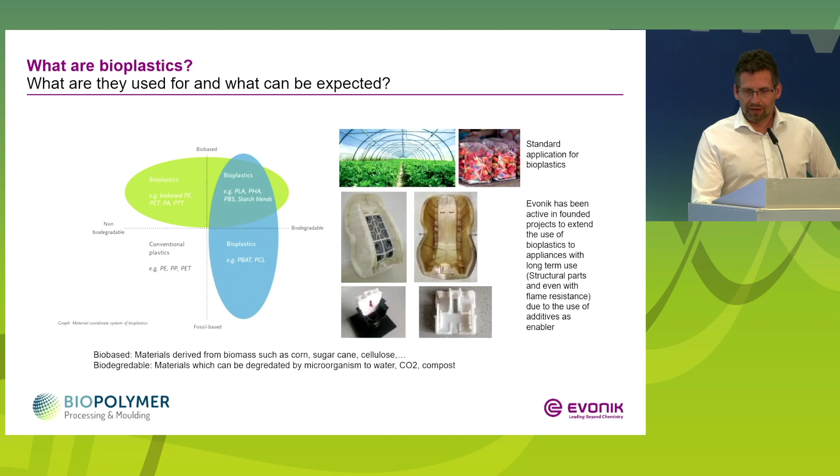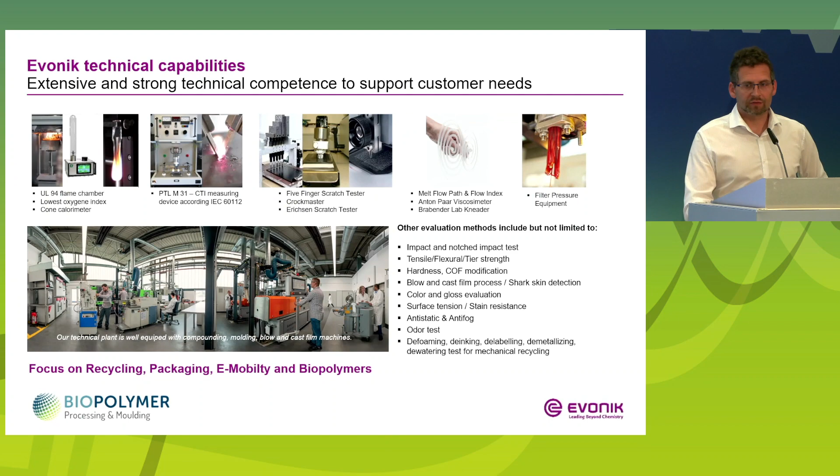The department I'm working for at Evonik is the application technology department. In my department we have a pilot plant with most of the plastics processing possibilities our customers are using. Our idea is to support our customers as well as possible, and therefore we build up know-how in a lot of different applications, especially flame retardant polymers, scratch resistant polymers, and dispersing of fillers, flame retardants and pigments. To evaluate the properties of the plastics, we have a variety of equipment in our lab. As already said in the introduction, we are now focusing on recycling, packaging, e-mobility, and biopolymer topics.

Therefore I will come to my agenda after this short introduction. First I will introduce our additive technologies, then in the main part of the presentation I will show you results from the research projects, the TechPLAstic and the RegScha project. At the end of my presentation, I will say a few words about our activities regarding plastics recycling, and finally a sustainable approach of a PPA for filmmaking.

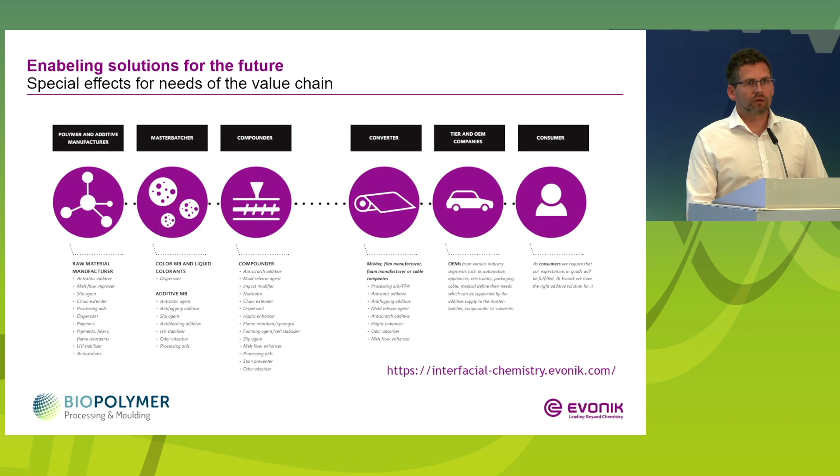Starting with a view of our activities, we try to approach the whole process chain, starting with the raw material manufacturers, which could be the polymer manufacturers but also the filler manufacturers. Here we offer solutions, for example a surface treatment for a pigment to make it more compatible with the polymer. The main customers are master batchers and compounders, where we have a wide portfolio of processing and performance additives. Since a few years, we enhanced our portfolio with our Accurel portfolio for the converters, where we approach molders and especially filmmakers so they can add a certain value to their product, like an anti-fogging aid. What is most important for us is that we are in intensive exchange with our customers, to get a deep knowledge of the market needs.

Regarding the additive technologies, we divided them today into 4 groups. The first group is the so-called organic modified siloxanes.

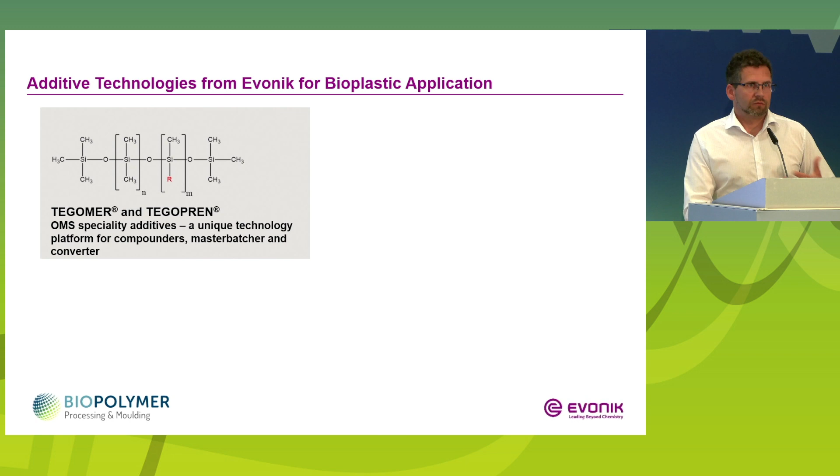So this is the specialty for our site in Essen, that we produce siloxane materials, and the specialty is the organic modification, which can be adjusted in a wide range, and we can offer different effects with this product group.

The second big product portfolio group are the organic-based dispersing aids. Here we have no siloxane backbone, but a polymeric backbone, where we add hydrophilic and organophilic groups to have a compatibilizing effect. This is the second group.

The third group of additive technology we offer is a so-called odor absorber technology, which is mainly used for recycled polymers. The fourth group is the so-called Accurel technology, which is a sponge-like porous polymer, and this is not one polymer - we have a portfolio of a wide range of polymers. The specialty is that we can produce, based on these different polymers, master batches out of liquid additives to turn them into solid ones.

And this is the first overlap with the bio-based or bioplastics topics. Here we offer two grades, based on the one hand on PLA and on a biopolyester. For you as a processor of biopolymer materials, if you want to add an additive and it's liquid and you want to turn it into a solid one, because a solid one is more easy to feed, we can offer to turn this special liquid additive into a solid one based on these materials.

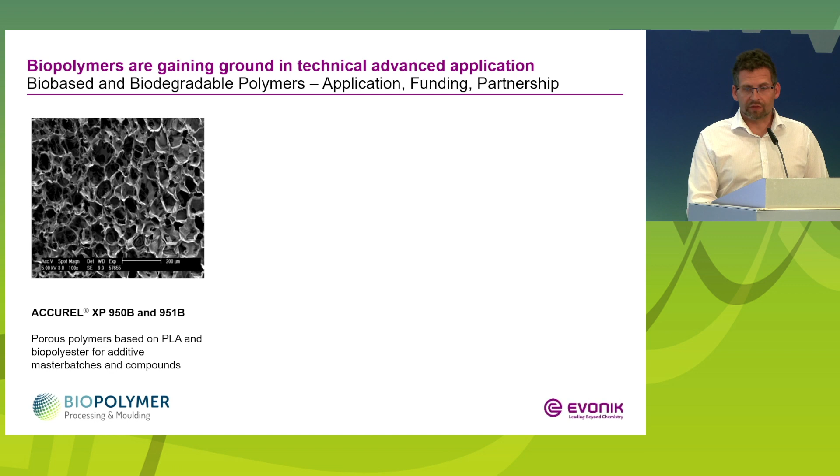In recent years we were working together in funded projects with our customers and with research institutes. The first project I want to talk about is the so-called TechPLAstic project, where we want to turn PLA into an industrial material, giving it flame retardancy, heat resistance, and a certain impact strength, which is needed for an industrial application.

The second project we'll talk about is the so-called RegScha project, where we try to incorporate natural fibers into a biopolymer.

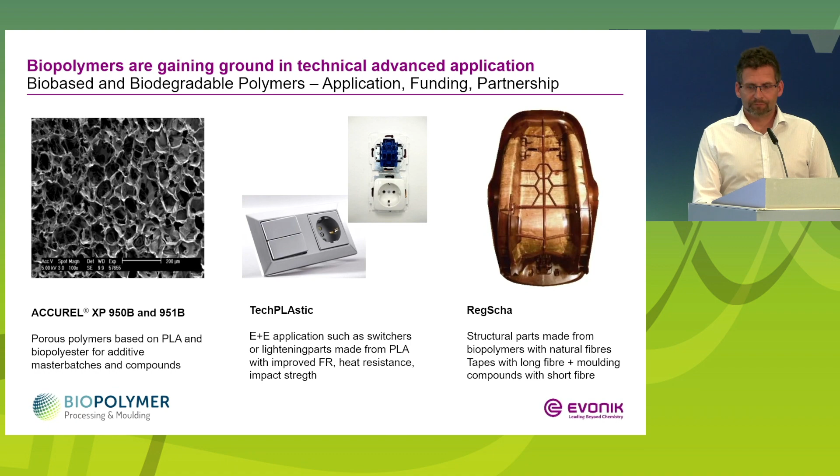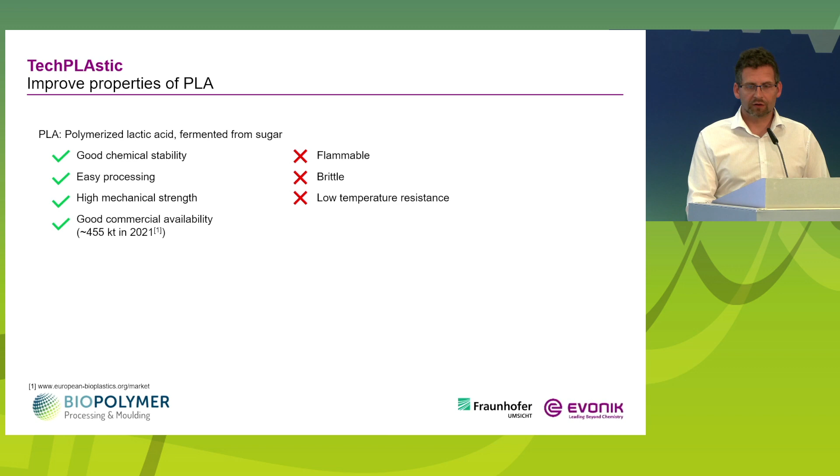Starting with the first one: PLA is widely used as a polymer for packaging applications, with its good chemical stability, it's easy to process, has a high mechanical strength, and is already well commercially available. But for industrial use, we miss the flame resistance. It's brittle, so we miss the impact strength, and even the temperature, the heat resistance, is not given.

So we had the idea to add flame retardants, impact modifiers, nucleating agents, and overall the Evonik additives do not offer this effect itself, but help to level and balance the properties, improve the processing, and at the end achieve an overall property. We did not add only these ingredients, but also looked at the processing, and there we looked at both an isothermal crystallization and a variothermal injection molding process.

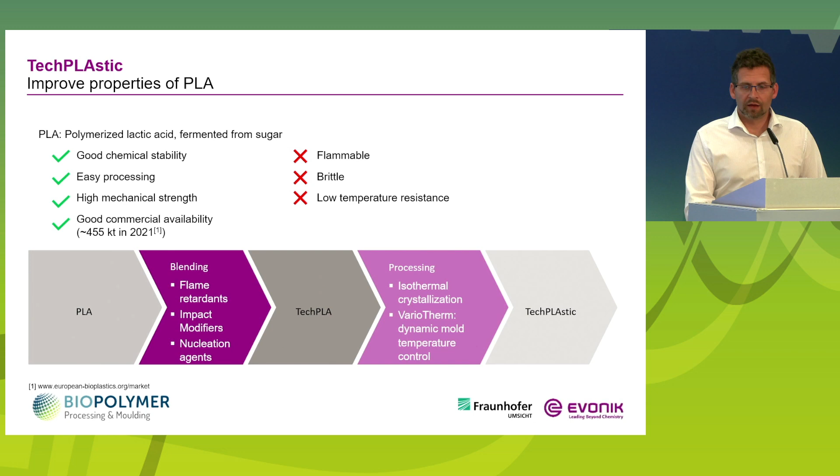When we talk about impact strength or flame resistance, it's easy to add a certain additive, but when we talk about heat resistance, it's more dependent on the morphology of the compound.

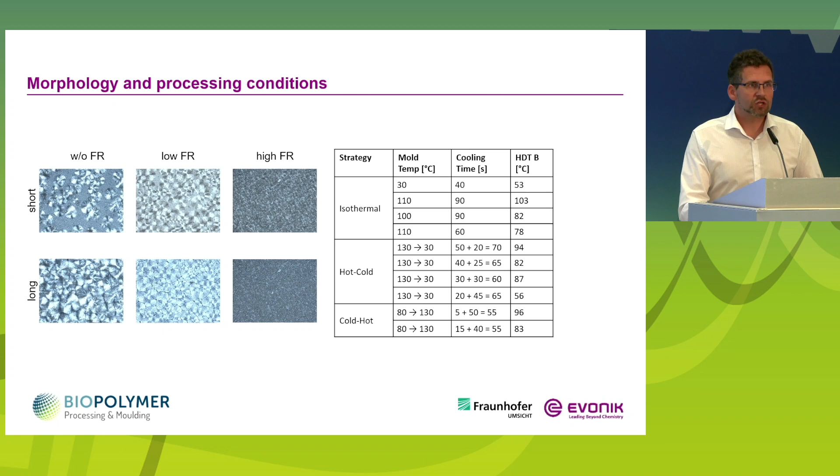Regarding heat resistance, it's beneficial to process the material at a higher temperature, around the glass transition temperature. If we increase the mold temperature from room temperature up to 110 degrees, we can double the HDT value, so the heat resistance is higher, but even the cooling time rises extremely.

Therefore we took this approach with variothermal processing, injection molding processing, which gave us the chance to reduce the cycle time from 90 to 70 seconds, and even lower it down to 55 seconds, while maintaining the heat resistance at around 100 degrees C.

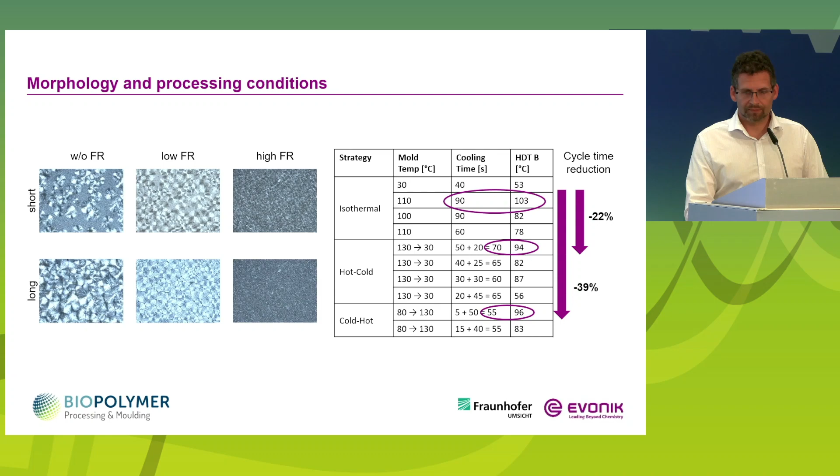At the end, we have to state that it's difficult to reach all three values in one recipe. So if we start with a PLA in the middle, we try to reach with the first compound all three properties, but we see that we did not reach the flame resistance good enough, and then we optimized step by step. But it was not really possible when we now look at this red target triangle to reach all properties in the same way. So we need to focus on the needed properties.

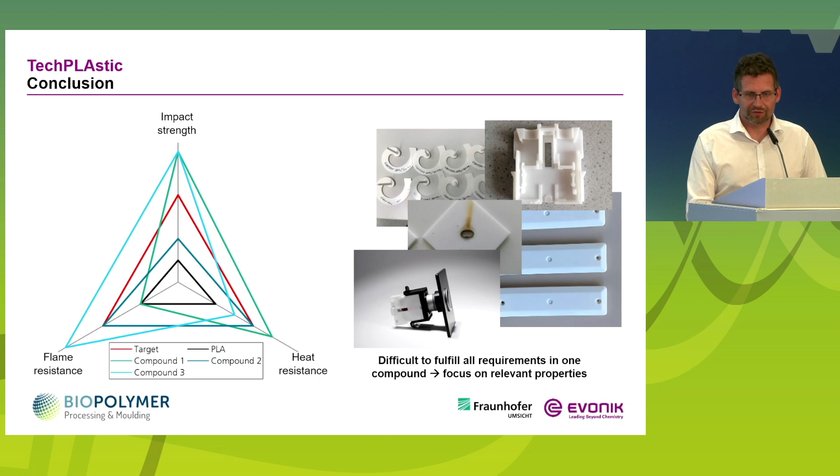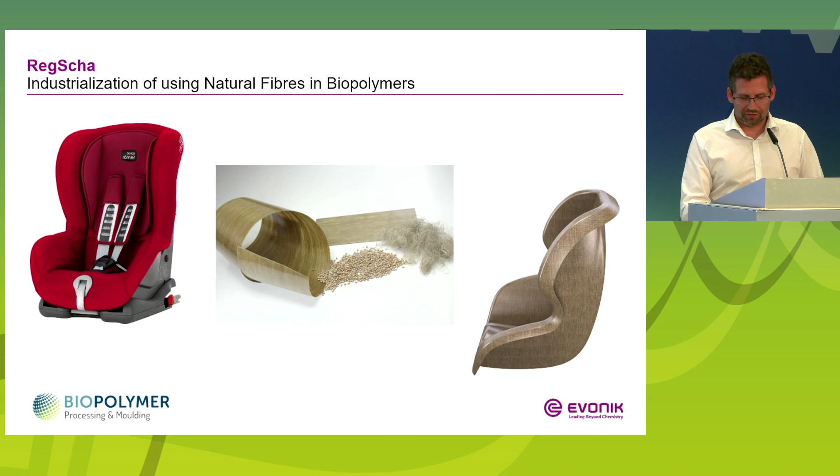Within the RegScha project, we talk about the industrialization of natural fibers and biopolymers, and with the example of this child safety seat, we approached this topic. In the next slide we see what were the responsibilities and the contents of this project.

We used flax fibers and wood fibers in the first step to improve the processing of the semi-finished products. We did a coating, for example, of the fibers. And as biopolymer, we used the Evonik polyamide 1010, bringing both together.

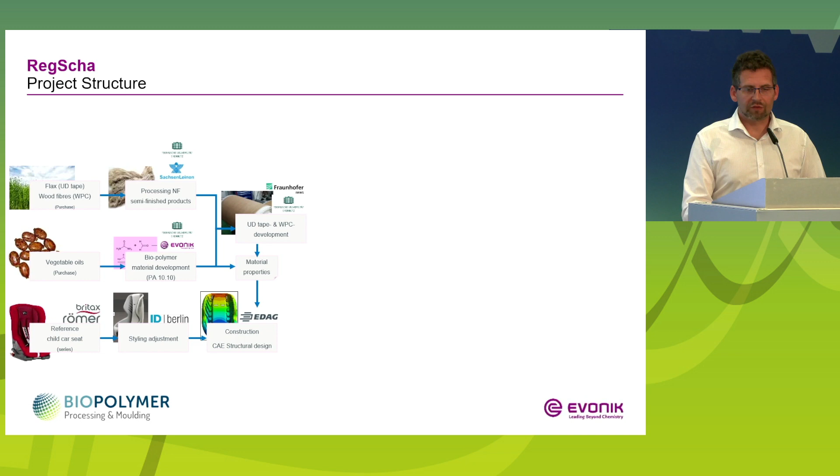On the one hand, we developed a WPC recipe and UD tape, and determined the material properties. In parallel, we came from the state-of-the-art geometry from Britax Römer, from the child safety seat, and adjusted the styling and had a construction which was composite conform, and could then go into the tool design and tool making.

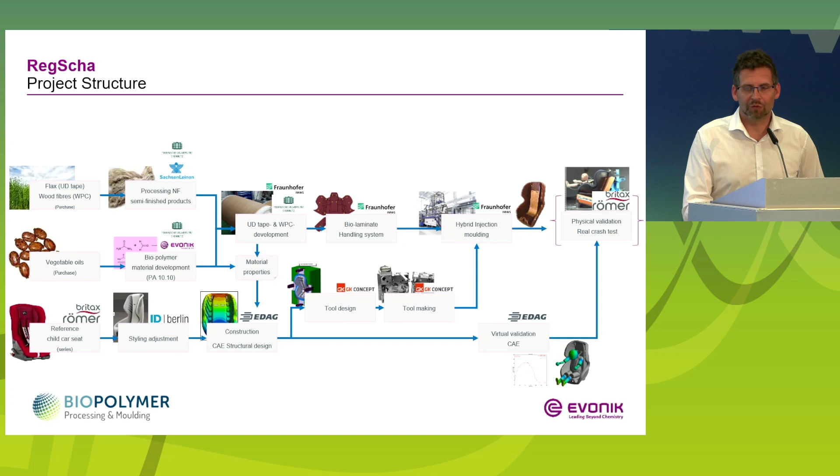Out of these UD tapes, we produced a laminate, and this was taken by a handling system into a hybrid injection molding process to produce this bio-based and natural fiber reinforced child safety seat. At the end, we had a validation, first virtual, and then what is not done yet, we want to do a physical validation with a real crash test.

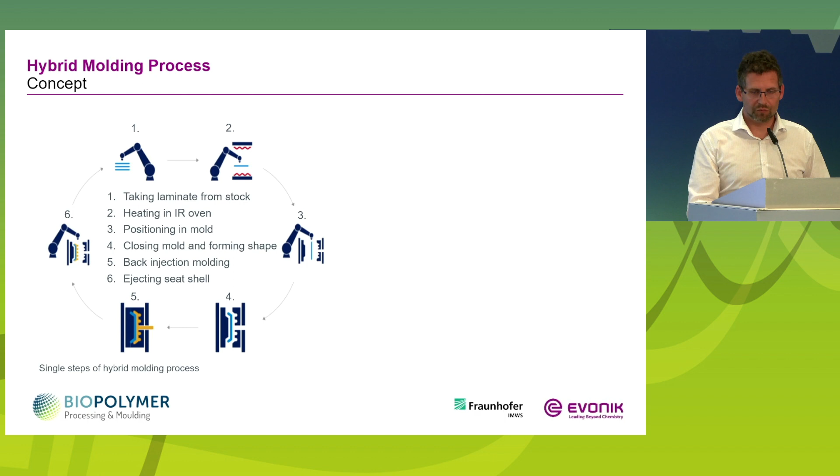From the hybrid molding process, in the first step, we take the laminate from the stock, heat it up in an IR oven, then position it into the mold, close the mold, and then the shape is formed. During back injection molding, the full form is molded, and then we have the possibility to eject the seat shell.

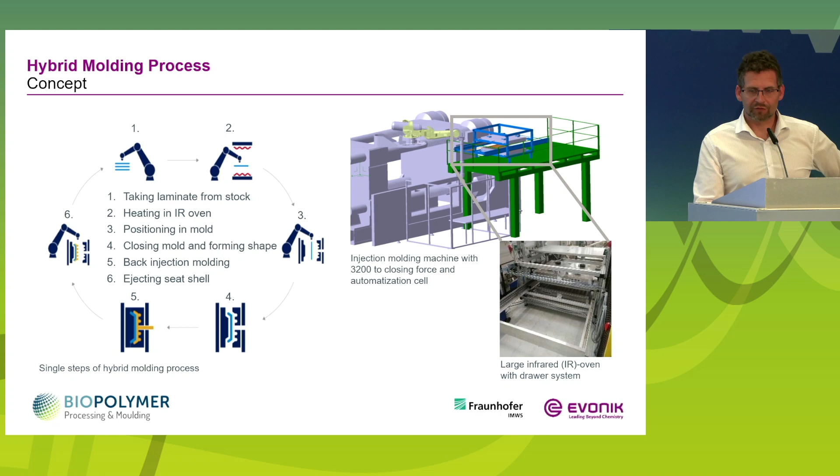This is the machinery, and on top this IR oven, which we used for producing this demonstrator. Here you have an insight into the mold where we produced the seat shell, and this is the final product at the end.

Now I come to the second part of my presentation, or the final part, where I want to say a few words about the recycling approach.

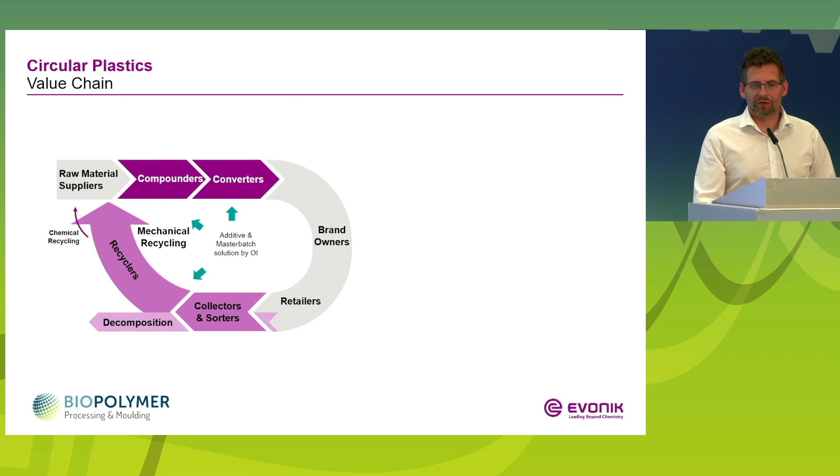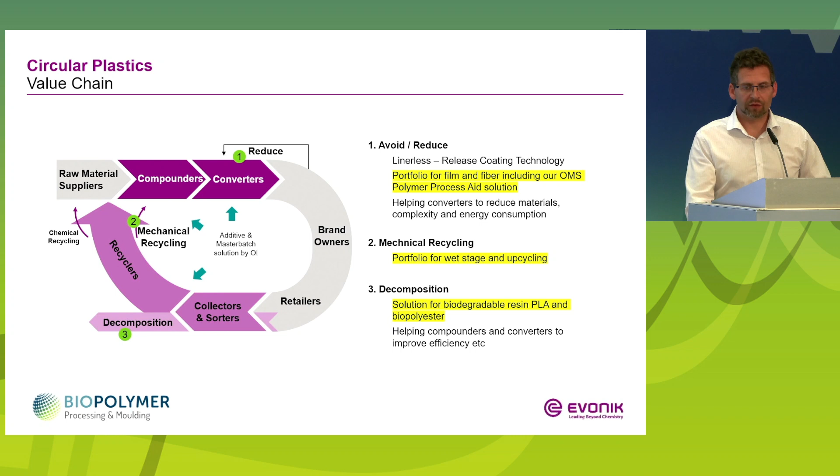We help to make circular plastics happen. The first step is, like we heard this morning, to reduce waste. We help the filmmaking industry, for example, by using our new processing aid to reduce startup waste. Then we build up a product portfolio for mechanical recycling that we can make out of this process chain, a process circle. At the end, we help a little bit during decomposing with our biodegradable additive portfolio.

Here you can see a typical process of mechanical recycling, starting in the beginning with shredded and sorted, pre-sorted material, which is washed, and then we have this so-called sink-float bath, where we can separate by density, and then you have a drying step, a pelletizing step, and at the end a compounding step.

In these different steps, we have the possibility to improve this processing. For example, during the washing step, we have wetting agents for better wetting that improve the separation, so no air bubbles stick on the light material or the heavy material, so it floats up. During the washing step, we have additives for so-called de-inking, de-labeling, demetallizing, which we'll see in the next slide as an example. And during pelletizing or compounding, we can incorporate additives for malodor absorption and compatibilization.

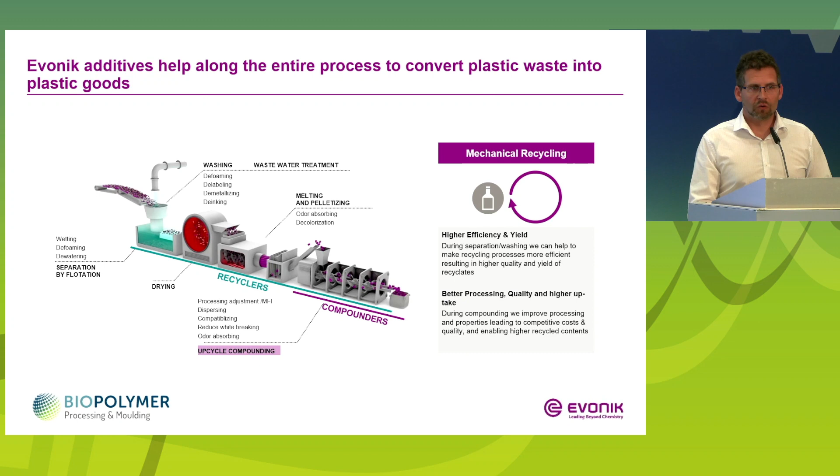Here you can see some examples that ink really can be removed, giving a more clean recycling stream, and even metallization can be removed, or some labels.

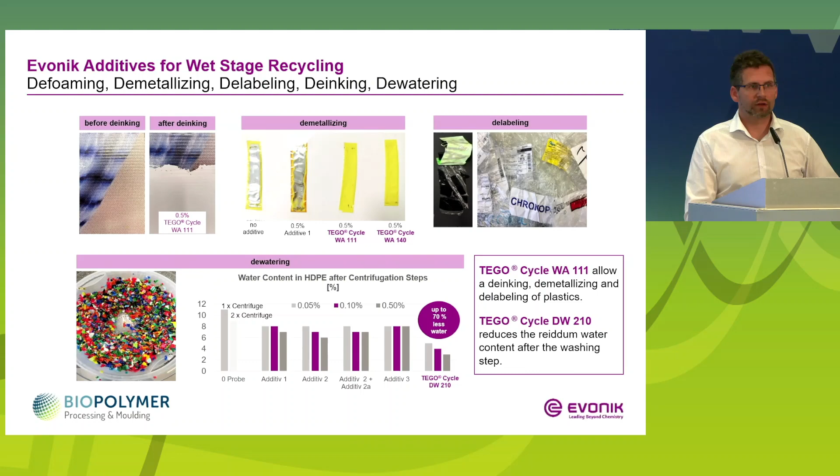With the dewatering, we have one additive which is also biodegradable, so we have no wastewater contamination, for example. Then we can reduce the water content to save thermal drying energy.

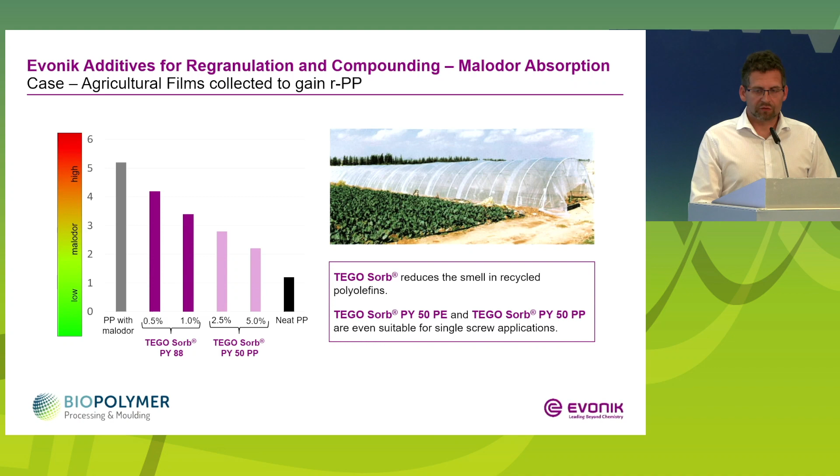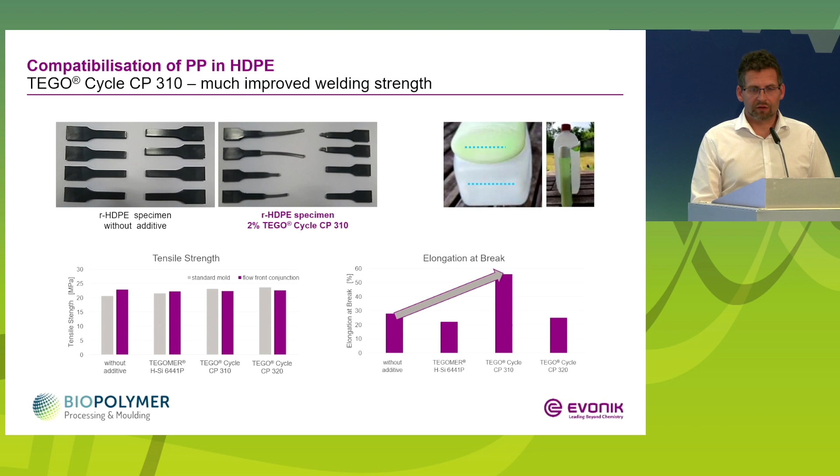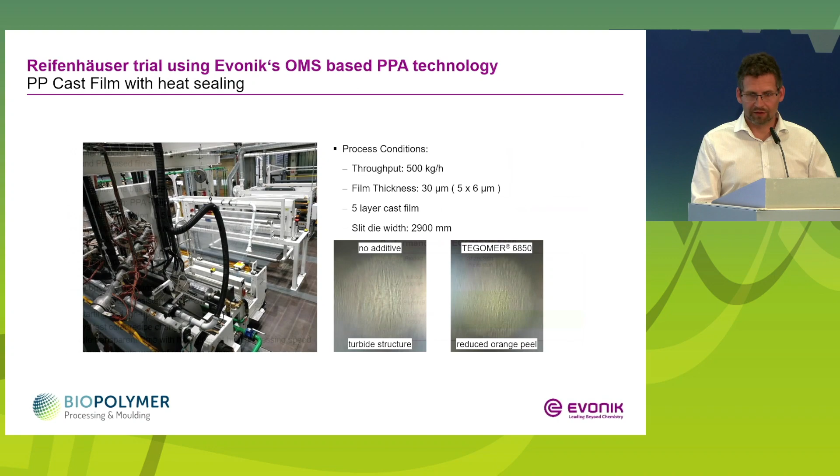At the end, my last two content slides, I will say a few words regarding the processing aid, which we already tested in a big trial at our machine manufacturer Reifenhäuser, where we produced a multi-layer film with a high throughput of 500 kg per hour, 30 micron thin and almost 3 meters wide. The idea is that we have an OMS-based polymer processing aid, and we have the chance to replace the fluorine-based PPAs, especially in the US.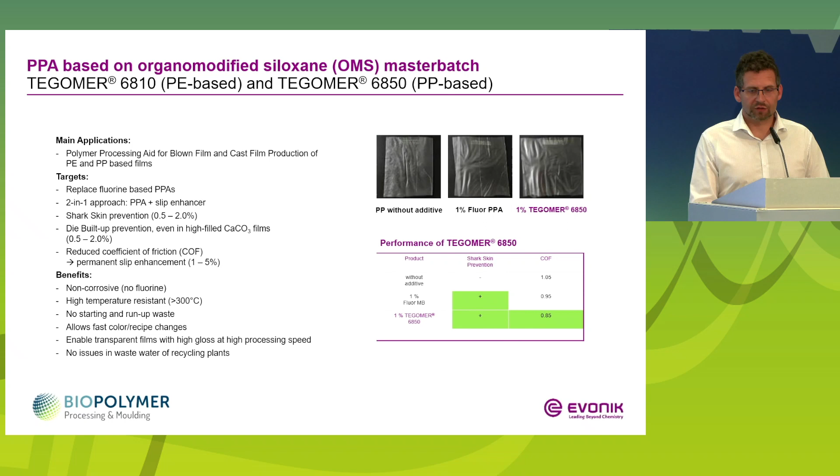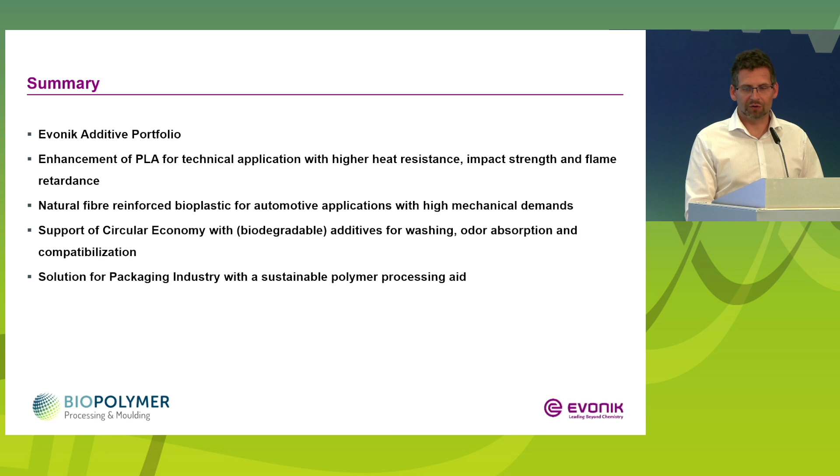The fluorine-based materials are already forbidden, and we have an all-in-one approach, PPA plus a slip enhancer, with the main focus to reduce or avoid shark skin and die build-up during production. With a closer look at the time, I can summarize: I first talked about our additive portfolio, then the enhancement of PLA for technical applications with higher heat resistance, impact strength, and flame retardance. In the second project, we worked on natural fiber reinforced bioplastics for automotive applications with high mechanical demands, and how we support the circular economy with our partly biodegradable additives for washing, odor absorption, and compatibilization.